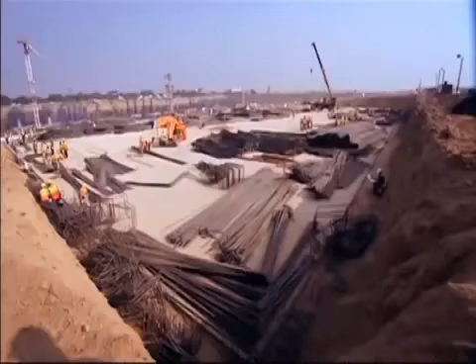A mammoth task completed against the backdrop of a looming deadline to the Commonwealth Games 2010. Thousands of workers construct India's largest post-independence building with unrelenting speed.

Technology was very much part of that system. I cannot change my specifications, I can't change the pipe. What are your deliverables at that stage?

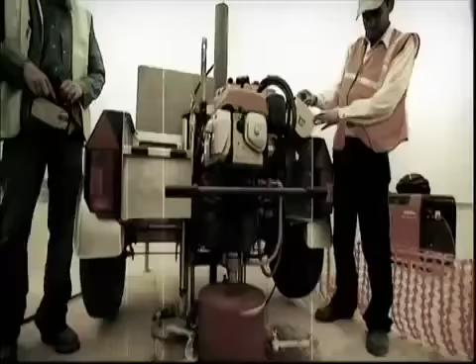This mega project brought in some of the brightest minds from across the world to design and build a state-of-the-art structure. Follow this team as they faced mind-numbing engineering challenges of installing a 45-acre roof and battled an unusual force. Everybody said no way, I can't put my name into this project because it is a seemingly impossible task before us. Watch this barren stretch of land on the outskirts of South Delhi, where a spectacular terminal megastructure comes to life in a record 37 months.

One of Asia's largest airport terminals, located in New Delhi, Terminal 3 is a symbol of India's emerging economic status. With a capacity of 34 million passengers per year, it propels the Indira Gandhi International Airport into one of South Asia's most important aviation hubs.

This complex mega project challenged the creators, the GMR Group, at every stage of construction. Enabling the Delhi airport to achieve a milestone of handling 73 aircraft movements in an hour, Terminal 3 is the first of its kind in India.

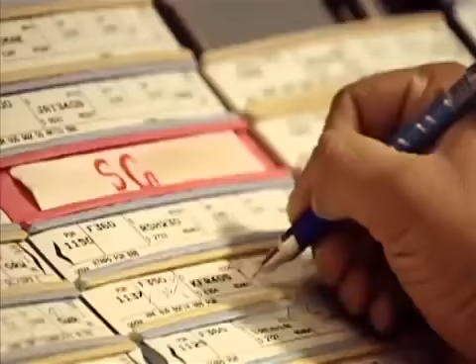There was something of an aviation gridlock, a traffic jam in the skies. So we had to make sure that our airport, the Delhi airport and the Mumbai airport, were good enough to cater to the needs of the next 25 years or so, and at least handling 50 to 100 million passengers.

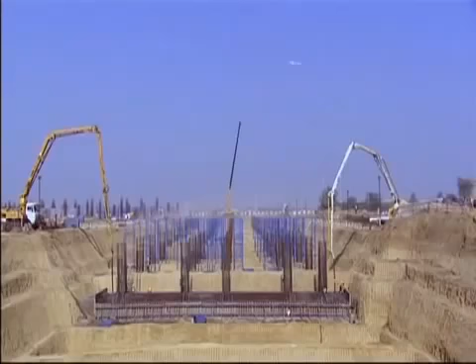On the southern outskirts of Delhi lay 300 acres of flat land, 3 times the size of the smallest country, the Vatican City. In 37 months, this is where the new terminal rose. On completion, it is said to be one of the largest and fastest built airports, an aerotropolis that represents modern Indian aspirations and infrastructure.

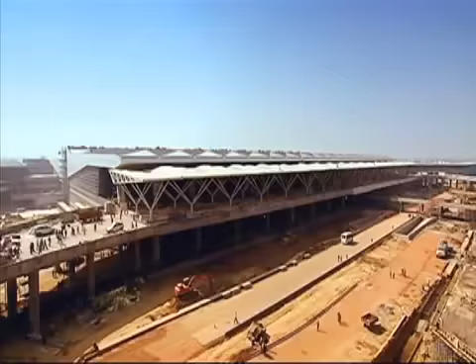In February 2004, bids were opened out by the government for the new terminal. The men behind the scenes had to be prepared for fierce competition. We prepared almost for 1 year before, and we put the best people assembled for the bidding. I should say it is a God-given opportunity to fly the flag of GMR in the capital city of Delhi. That is the commitment which made us win this bid.

January 31st, 2006, the GMR Group won the bid, but for a company that started with agriculture-based industries and had slowly moved into the infrastructure space over the past decade, getting the basics right was tougher than it seemed. GMR was new to the business of building airports, but raring to take off.

Chairman G.M. Rao, the man behind the vision, set out the roadmap for the project. We have taken almost 16 international consultants. And for us at that time, spending 34 crores for bidding was a huge amount of money.

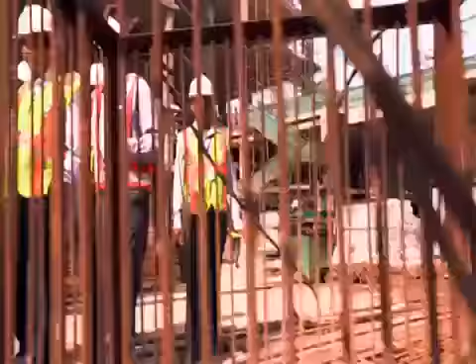Heading the project was I.P. Rao. That's the workshop, I need in 2-3 days time the whole design just to change. An industrial engineering veteran, having worked on several power and steel projects in the past, I.P. Rao was the angry young man of the airport - silent, strong and religious.

Rao's mantra was that belief in something can make it happen. The terminal was his baby. '17th, for example, yesterday, 0.21% plan.'

But he had never built an airport of this scale before. 'That's our major target.' His biggest fear was the deadline. 'This week overall, what is the daily shortfall here? We will definitely be falling short of the cable.' 37 months to build the airport from scratch. 'Once it's over, I want to sign off, seal it, then you can go full-fledged.'

Typically, construction of new terminals across the world takes over 60 months. Changi Airport's T3 in Singapore took 76 months, Beijing's T3 took 60 months, and so did Heathrow's Terminal 5 - from concept to commission.

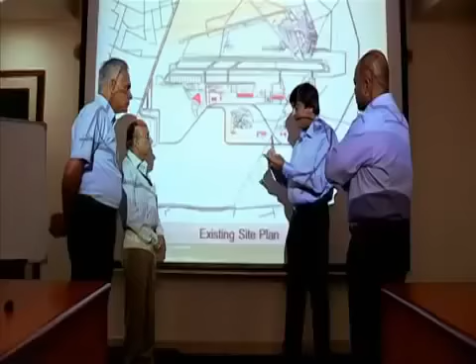At the very start of the project, I.P. Rao was faced with a challenge that tested his leadership. The GMR Group had bagged the country's most prestigious project, but then came a twist.

They requested us to shift the terminal from one side to another side. We had taken over the terminal which was built in the 1940s, and immediately after takeover, people were expecting that miracles would be done. There were certain parameters which they fixed that we had to change. It was a terminal built only for about 12 million passengers, but it was already handling 16.2 million passengers by that time. It was a Herculean task, but we were able to do it.

'How to do that? So gentlemen, that's the workshop.' It was April 2006. The master plan that GMR had presented was based on the government brief, but that had to be changed. It now had to come up at a location 180 degrees from where it was originally planned. 'Get more people, designers on the table, get all of you, and then sit down. I need a whole design just to change.'

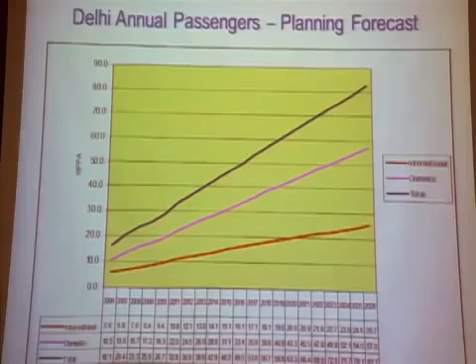This had many implications. Also, at the time of the bid, the government had proposed the terminal for 22 million passengers. But GMR conducted a study along with the travel trade industry and learnt that the terminal needed to have a capacity of up to 34 million passengers - that was 12 million more. Certainly not a small change.

The GMR team worked furiously on revising the master plan. 'But one thing, safety-wise, have you taken care of? The whole passenger requirement has tremendously changed. More than 1.5 times have been jumped, and then you have to redo the entire building and reroute the entire area. That's really given a big challenge for us.'

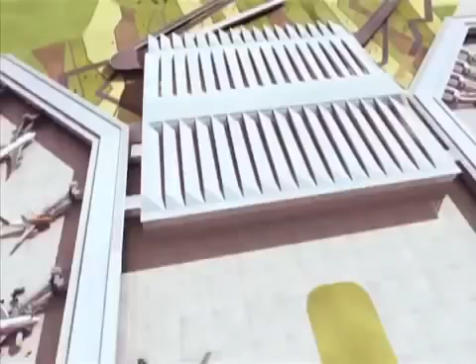The GMR Group studied various international airports like Dubai International Airport, Beijing Capital Airport, Seoul Incheon International Airport, London's Heathrow and Madrid's Barajas Airport to incorporate the best features for Delhi's new terminal. Finally, in December 2006, the new plan was approved.

The new passenger terminal building rises 9 levels, covers an area of 5.4 million square feet, approximately 94 football fields. The design is futuristic, with a strong emphasis on keeping it eco-friendly. Passenger flow is natural and instinctive, either moving towards the aircraft or away from it. Below them, almost 7 kilometers of baggage conveyor belts hurtle through, making for 5 levels of high-end automated security screening. At 4.43 kilometers, the airport's runway is the longest runway in Asia.

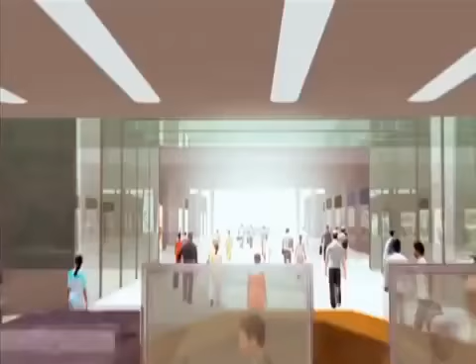Once the design parameters were fixed, the construction got underway, but it was not as simple as it seemed. 'I should really give credit to the government that for the first time a private airport operator, a private company, was called into a National Facilitation Committee, headed by the Cabinet Secretary and monitored by the Prime Minister himself. They were people who understood our challenges, and they've been pretty helpful for us in getting clearances.'

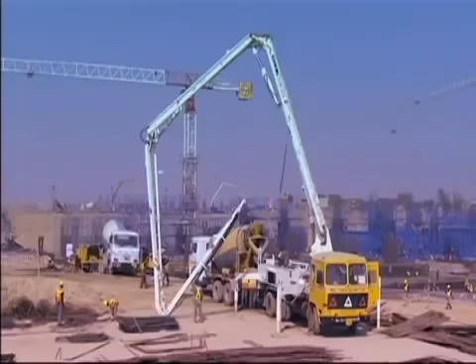'Delhi Airport - because the time was very short we had, so we had to do planning, designing, identifying a contractor, and at the same time implementing the project was going on very parallelly.' Larsen & Toubro, one of India's largest construction and engineering conglomerates, took on the runway, taxiway, aprons and the terminal building. 'When we got into it, we had to mobilize nearly 1,000 engineers from more than 40-50 nationalities, and to mobilize 30,000 workmen, to mobilize concrete production of nearly 1,000 cubic meters per day.'

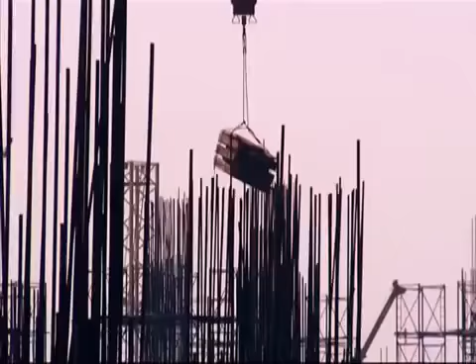At first, the land was flattened out and then the earth excavated, enough to fill a 210-kilometer long freight train. This project needed tons of steel, concrete and other building materials.

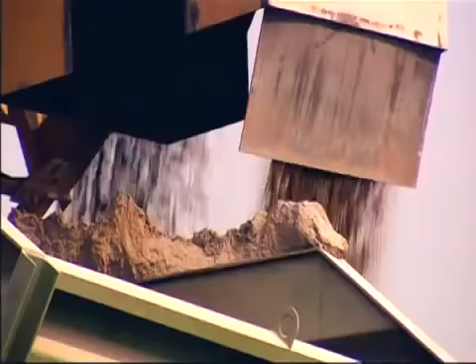To avoid disruption, it was decided to keep stocks of up to a month's requirement. The most modern and eco-friendly hot mix plant was imported from Italy and set up at the site. The plant was crucial to timely completion of the runway and terminal access roads.

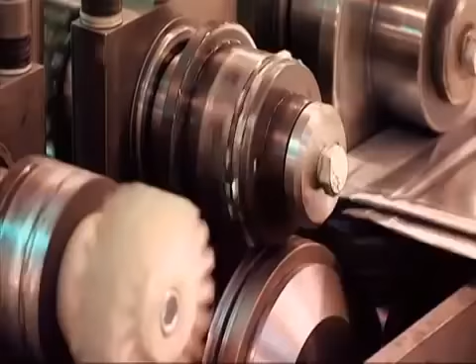Meanwhile, vendors were encouraged to move their fabrication units to the project site to cut down on logistic delays. We wanted to make sure as much as possible to have control of ourselves, so we bring the raw materials in and then we would shape them.

Before excavation started, the site of the runway was being evaluated. Active and animated despite his 70 years, R.C. Rekhi was the mastermind behind the plan and design of the new runway. The runway was envisioned such that the entire system could handle over 70 aircraft movements at peak hours.

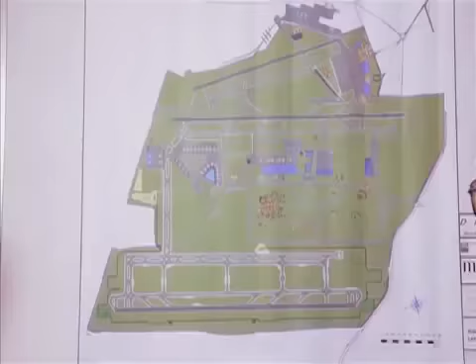But when the master plan changed, so did the direction of the runway. Now this posed a rather unique problem. The design and construction of Delhi's new runway was battling an unusual force.

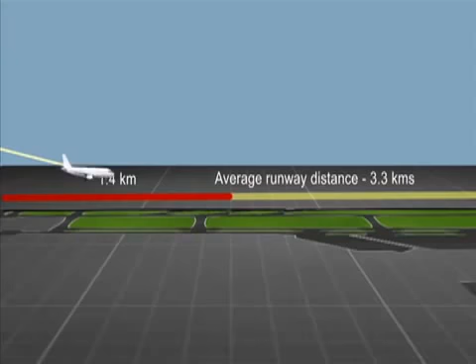Simulation showed that there was a nearly 80 feet high Hindu god Shiva statue in the flight path. Typically, incoming aircrafts must clear 1.4 kilometers of runway before they can touch down, but this was not possible due to the statue and its height.

This meant all flights must land almost 2 kilometers after the runway actually starts, forcing the pilots to use full brakes and reverse thrust to slow down before the runway ran out. This was extremely dangerous and could lead to accidents.

Lowering the statue or relocating it would no doubt raise religious sentiments and could take months. Simulations were done and detailed calculations and flight paths studied. Here were the best engineering minds looking for a solution.

So I asked the engineers to understand, tell me what is the way out. Sir, we have to shift by 10 degrees. If we shift by 10 degrees, the whole plan gets disturbed. So I told them, tell me, to what degree does the Shiva statue have to come out. We found 3 degrees. I fixed the runway and said go ahead. They were shocked. Sir, nowhere does this happen like this.

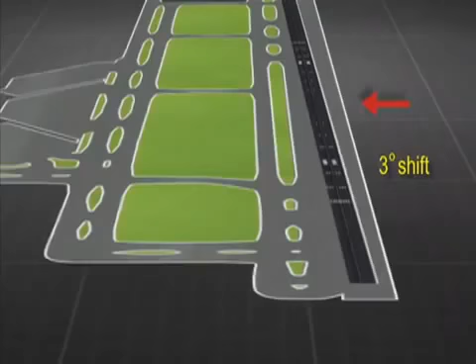At last, a solution emerged. The new runway was planned at a slant of 3 degrees from the original and was eventually extended by 1,460 meters to be compliant with air safety standards. At 4.43 kilometers, runway 1129 is one of Asia's longest runways. This allows planes to approach and land safely.

Construction finally began. But there was another problem. The site of the new runway had been a swamp for several decades. This had grave consequences for the new runway.

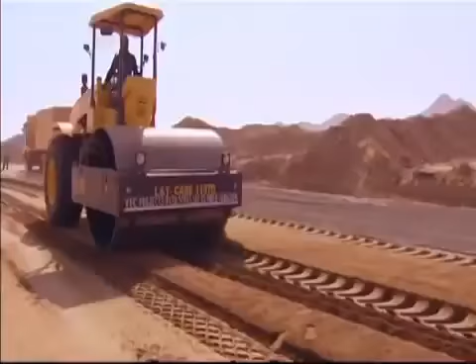This meant that soil on the runway site had very low load-bearing capacity, not enough to take aircraft load and landing impact. Ultimately, the load imposed by the aircraft has to be transmitted to the soil only. If the soil has a bearing capacity that is far lower, it only means your pavement thickness must increase correspondingly so that the load is transferred over a larger area of the soil.

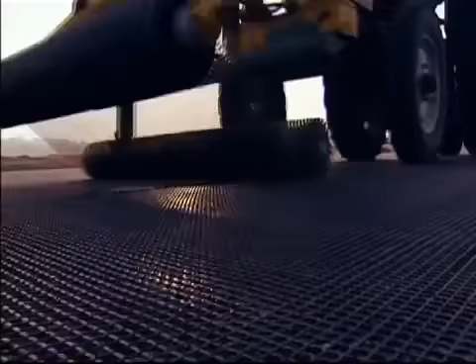The solution: to strengthen the soil by mixing it with cement and using glass grid fabric between the layers to increase the bond between them. For the first time in the country, we did this base layer with a cement-treated base. The aim was to design it for next-generation aircrafts like the A380s with a takeoff weight of 550 tons.

For the terminal structure, the real challenge was to keep the design simple and construction well planned. A lot was at stake. How will all this come together without chaos and wasteful mistakes?

Meanwhile, the existing domestic airport needed urgent attention. The existing facilities were creaking under the huge increase in traffic, both of passenger and aircraft movements. The domestic terminals were designed for 12 million but were already handling 16 million passengers. Improvement works had to be carried out in a saturated terminal, so it was a stupendous task, I would say. No other airport in the world has actually gone through this kind of rigor.

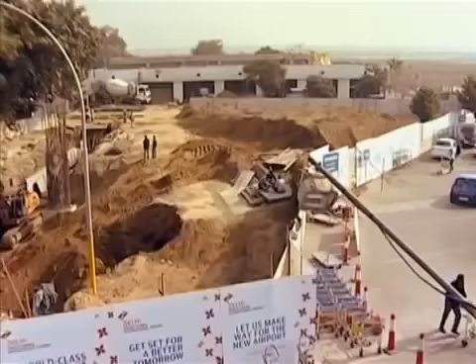GMR went on a war footing to solve this problem. We felt certainly there is an important need that we have to start a new terminal to decongest and also parallelly make it ready for T3. Terminal 1D was built to ease the pressure in the interim.

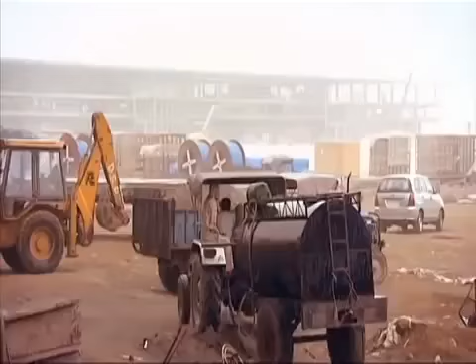Over 30,000 workers were on site in peak summer, through dust storms, the monsoons and foggy winters. Often they worked in precarious conditions, manning heavy machinery. At times, power would be intermittent, leaving electrical cranes hanging dangerously. Men would be caught in lifts and in darkness.

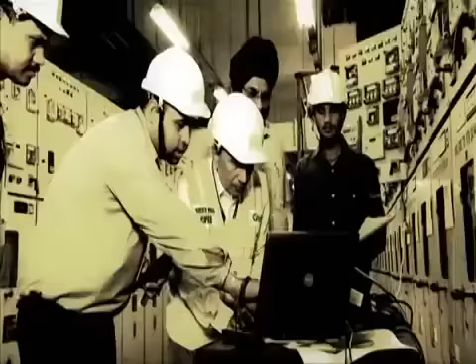Uninterrupted power was a key word for Sujit Nag. Highly disciplined and process-driven, Nag had to be on top of it all the time. There was no room for mistakes.

An electrical engineer by qualification, Sujit had worked in the US, UK and Asia, setting up power plants, mammoth projects with pressured deadlines. But he had never worked on a megastructure like this one.

His main responsibility was to power the construction works and later the Terminal T3, which would have millions of passengers walk through it from all parts of the globe. Very basic of having the power supply from the distribution company.

That was not ready, so obviously we have to carry out a temporary arrangement. Biggest challenge is that I commission the system, and at the same time, I give the power supply to the operational team.

Anil Dhawan, head and construction manager of T3, was a man on the move. He is athletic and passionate about fitness, whether he is on site or in office. In a military-like manner, Anil led the team that constructed the terminal.

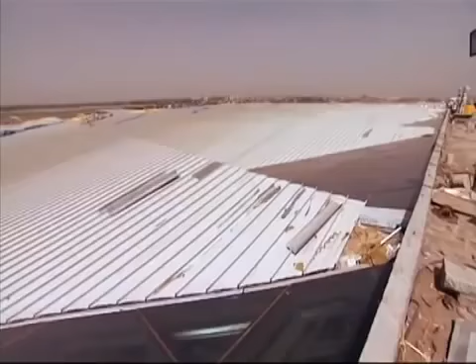Anil's big challenge was to assemble the roof. The expanse of the roof and the pier spread over 45 acres, and an 18,000-ton steel structure was to be installed on top of it.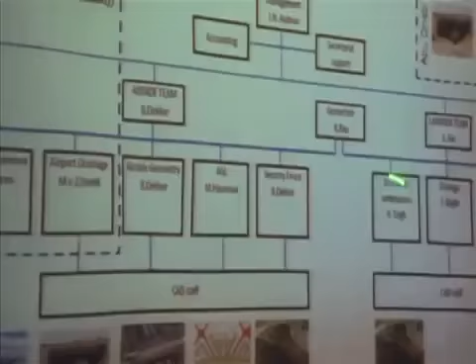The GMR team went over every engineering detail with a fine-tooth comb. Was the design sound? What kind of equipment was needed to achieve this task? What are the specifications that you would be actually... Anil needed to find answers soon.

Any delay in completing the roof would have cataclysmic effects on the costs. They had to cover an area of 45 acres with structural steel that was fabricated and brought in from Singapore. The critical element was the girders, which came in dimensions of 5 to 10 meters each.

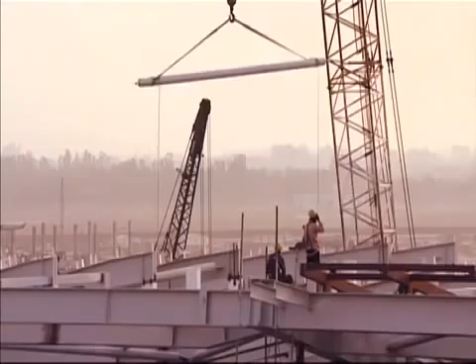For engineering purposes, the roof was divided into the land side and air side, and further divided into 6 smaller units for efficient handling and placement. Each of the 6 units weighed heavier than an A380 aircraft.

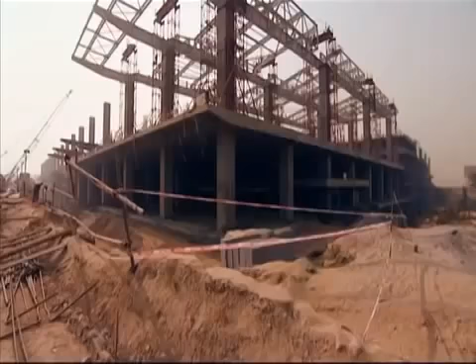We allowed ourselves about 6 months to actually complete the roof from start to finish. There was no room for error. Erecting the roof was a key milestone in terms of the project timeline, as it was only after this that all the other civil and technical works followed.

The weather was a key factor here. Our original plan was to have the roofing installed by April of 2009. The monsoons were only 5 months away, and GMR had to finish the roof structure before the rains lashed through Delhi.

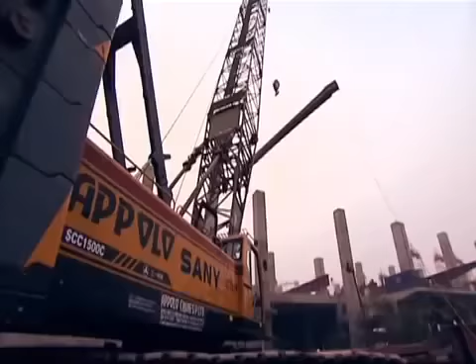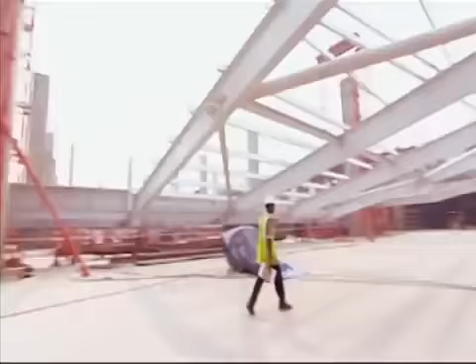Anil's team had been preparing intensely to begin fitting the roof structure, and they were now ready to start. Each of the units were first assembled at the 10-meter departure level, then raised 18 meters using computer-operated hydraulic jacks.

Every millimeter lift had to be done in unison, its alignment checked multiple times. A minute glitch could have disastrous consequences on the project timeline. Engineers were on edge as this sort of lift required utmost precision.

Each lift took about 6 to 8 hours. But designing of the lifting system took us 2 months, and getting the jacks required for that took another 2 months. So really, physically to start at site, 4 months of back work we did on the table. 22 months left to go.

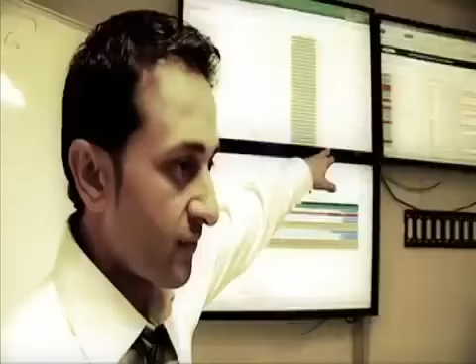Davesh Shukla was young, hungry and powered by a strong creative streak to create something one of its kind. If his IT systems failed, the entire airport would collapse.

Bring in efficiencies, better operation procedures, and make people's life more easier, and at the end of the day, that's what integration is about. By the time we finished, it was more than 75 systems that we started integrating together.

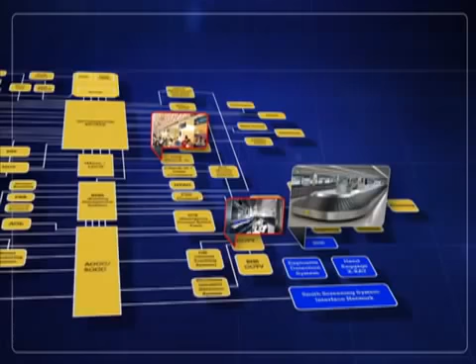If Davesh has his way, then his IT systems will connect every system in the airport, from check-in counters, baggage handling, airport screens, lighting, passenger movement systems like boarding bridges, emergency systems like the fire department, and key services like immigration.

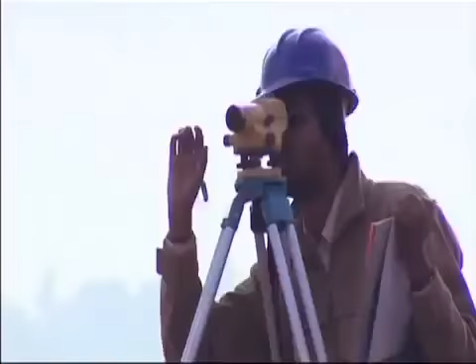It is practically the lifeblood of the airport. The aim being to make for a faster turnaround of planes taking off and landing, and most importantly, giving the passenger a smooth experience. Meanwhile on the runway, Rekhi and his team were on the last leg to finishing the construction. They now had the challenge of delivering a high-tech runway.

There was a dense fog that settled over Delhi during winter that resulted in very poor visibility. Flights were either cancelled or delayed as they were unable to land or take off in these conditions.

To make matters worse, the runway site was close to a green belt, so the intensity of the fog was even higher around here. To counter the thick fog, it was decided that the runway was to be made Cat 3B compliant, which meant it will allow flights to land and take off even when visibility is as low as 50 meters.

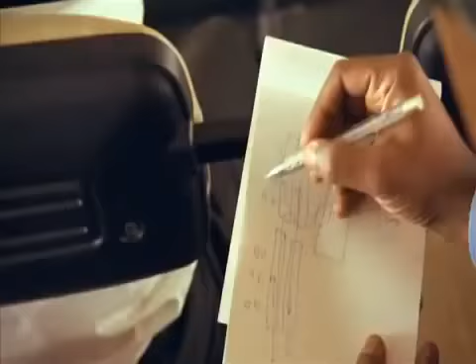An Indian origin Singaporean citizen, Roy, is a people's person, but he had no easy task. He is responsible for everything that enables movement in the terminal: travelators, passenger bays, and baggage belts. He had to set up the complicated maze of belts that would safely transport and handle 12,800 bags per hour. The expected footfall by 2020 was projected to be over 60 million.

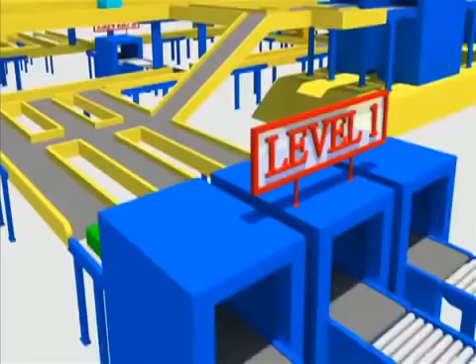We actually went into Changi Airport, KLIA, Hong Kong CLK, including Munich and Heathrow London. So there we actually tried to understand what exactly the best practices they follow. The baggage handling system design was a complex one. Terminal 3 has a state-of-the-art complex that features the common use terminal equipment baggage handling system with explosive detection technology for greater efficiency and security.

Hello, hi ma'am, how's you?

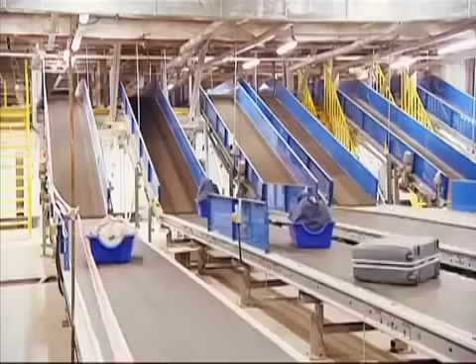Once the passenger checks in their bags, the bags go through a number of checks. At first, if a bag going through the X-ray check is found to be suspicious, it is automatically separated and diverted through another channel. If that is actually clear, the bag will go to the respective destination. And if it's not clear, we have a team of security experts who will visualize these images and interpret their content. And if it is accepted, it will go to the respective destination.

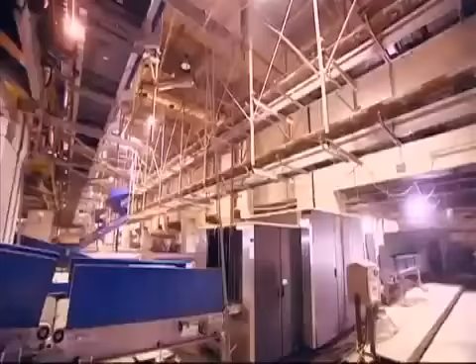And if it is rejected, it will go to the next level of screening, which is our CT screening, where it will slice the bag into 65 different pieces, inspect and take a decision. If it is rejected again, it will go to a team of experts reviewing those images. From there, an accepted bag will go to the destination, and a rejected bag will go into level 4 screening area.

Work on the baggage handling system began and the key contract was awarded to Siemens.

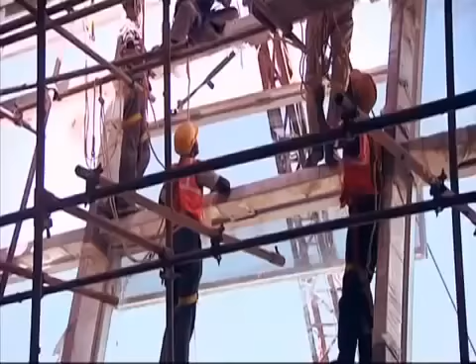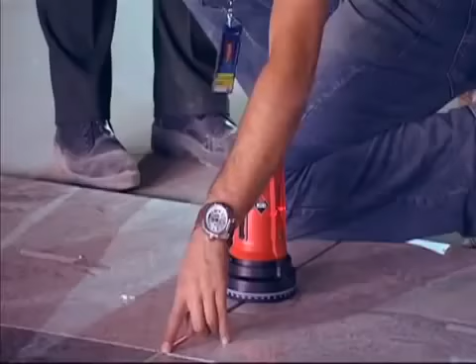In other parts of the terminal, glass was being fitted. Flooring was simultaneously being laid and was closely supervised, checking the level after each step. Laser-guided measurement tools were used to ensure that over 100,000 square meters of granite tiles imported from Brazil were properly aligned.

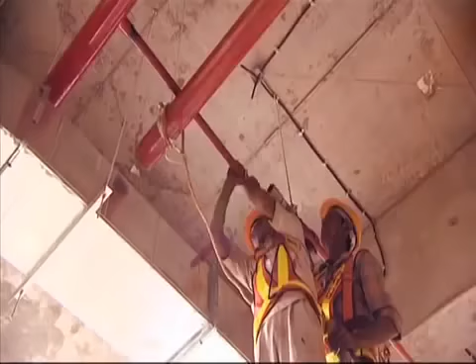With multiple vendors at work, clashes broke out. It threatened to upset the schedule, result in cost overruns and engineering nightmares.

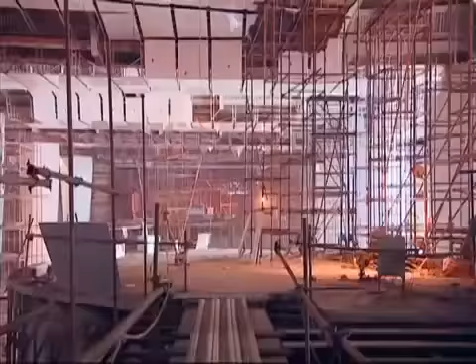So in September 2008, GMR brought in the BIM, or the 3D Building Information Modeling software. You fed in all information and technical specifications of each aspect—power, baggage handling, IT and security—and it simulated conflict areas, and programmed the flow of work and resources required.

This stage of construction was the most pressured. I think this was probably the only project, the first project to have employed that, and to have actually developed a 3D model where all the obstructions were looked at and cleared prior to the installation. We saved cost, we saved time, and we were able to produce a quality product.

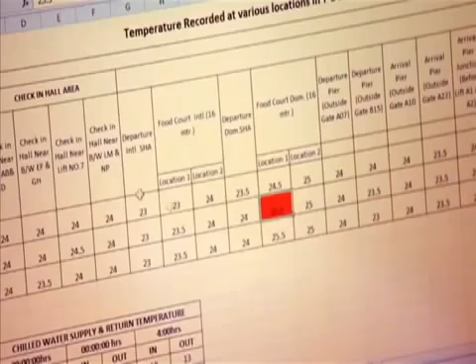Sujit Nag had an added brief to ensure that the airport was environment friendly and LEED certified. Temperatures in Delhi range from 5 degrees in winter to an extreme almost 45 degrees in summer. All the glass meant higher power usage to keep the area cool and comfortable for passengers. It was a tricky balance of maintaining good lighting conditions and keeping the heat out.

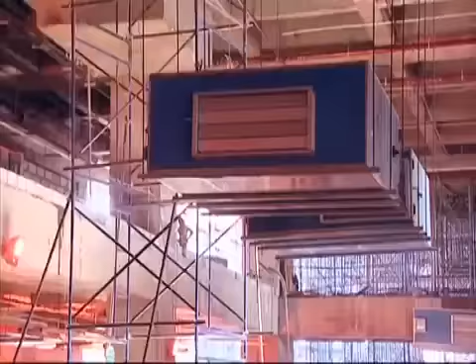The roof was designed with slits to take advantage of and use natural light. A central monitoring system, CMS, is used to control automatic sensors that detect day and night times and sets temperature and light accordingly to use the least energy.

We are the first airport that achieved this. No other airport in the world has got a green building certification in gold category.

It's action stations at all ends and the deadline is crashingly close. Will everything come together in time?

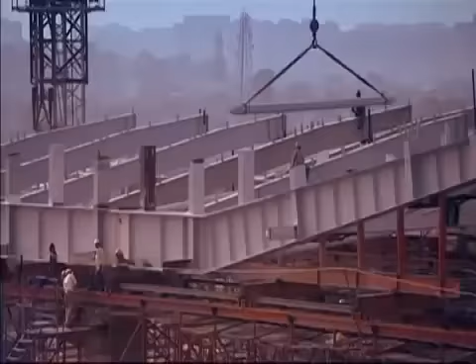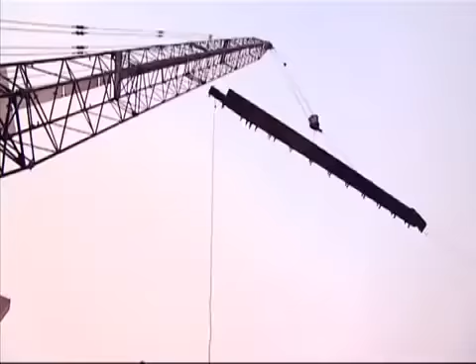Meanwhile, Anil was racing against time to finish the roof before the monsoons arrived. On the air side, GMR adopted the pull method to install the roof. Cranes carried the massive structural steel girders to the top of the tower, where each section was assembled and pulled to an intermediary level. Finally, with 4 massive horizontal pulls, the roof layout was completed. Week after week, 18,000 metric tons of structural steel was fabricated, assembled and raised.

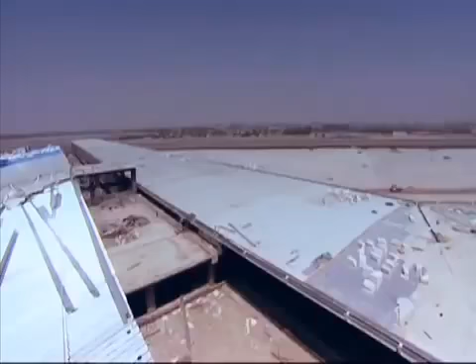The roof of the terminal and the pier spread over 1.3 million square meters. The 7-layer sheeting system was designed to provide the highest degree of insulation and sound deadening. Finally, the roof was covered and completed. It was a key milestone.

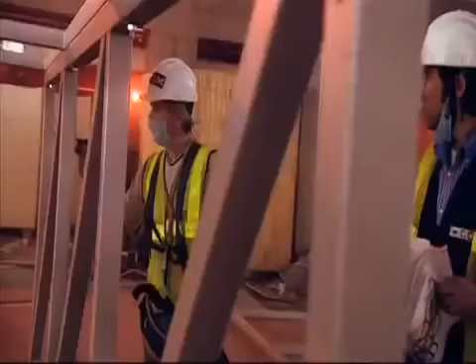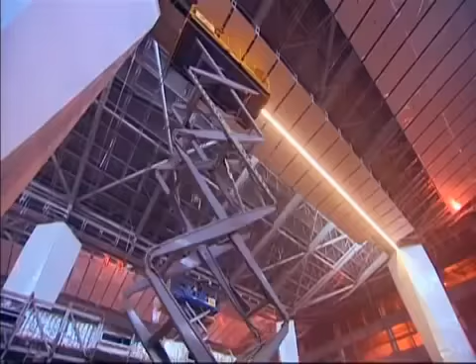Engineers and vendors already at work on site redoubled their efforts, now adding all the elements that turned what is said to be India's largest post-independence public building into its most prestigious airport. Suspended from the roof were a number of essential services like the air conditioning, fire prevention sprinklers and lighting fixtures. All these had to be in place before the false ceiling hid them away from the view of the visitors.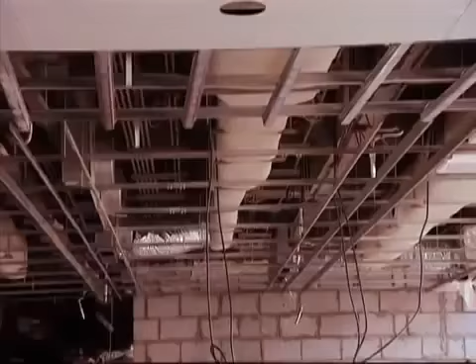For the ceiling, L&T was called in. The false ceiling contractor got into the job and then realized that there's such a massive area that all the false ceiling people in India put together could not manage this. So we had to train our own people, get them inside.

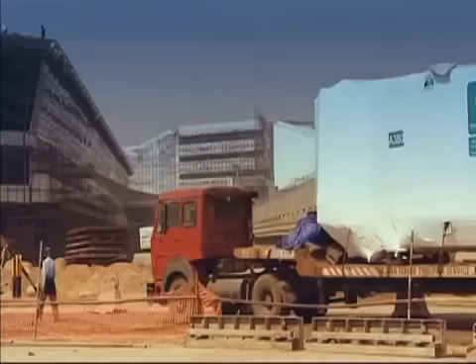On the air side, a complex set of processes were at play. Roy oversaw the installation of the passenger boarding bays. These were manufactured in China and Japan and transported to the project site in Delhi. They are delicate units that fit into the aircraft door at one end and at the terminal on the other. Any damage to the units would render them useless or dangerous to install.

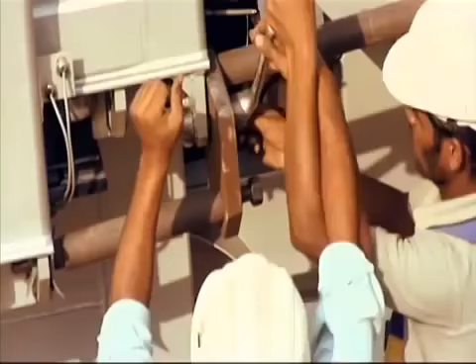July 2009, Roy and his team were tracking progress. Then one night, he received a call. 2 of the trucks transporting the delicate passenger bays had overturned in an accident. The bays were badly damaged. With just 8 months to go, it was impossible to manufacture new units.

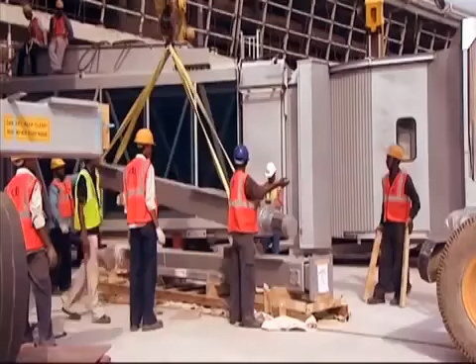Roy had to come up with some other solution. We tried to actually recover these 2 units, but it was not possible because of misalignment. So we, together with the factory team members, sat together and diverted 2 bridges which were actually meant for other airports, converted that with our dimension, and transported back on a timely basis.

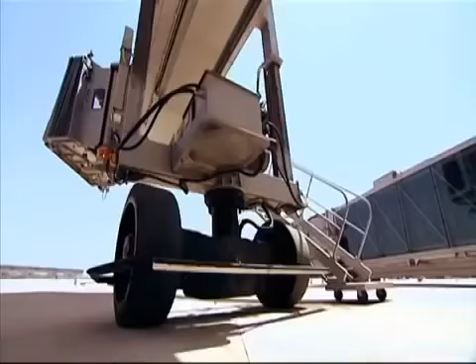Roy and his team started installing the bays. It took 6 hours to install each one, and there were 78 bays to be installed. It was high alert on all fronts. All departments were working furiously 24/7 to complete construction, fittings and interiors.

In about 180 days, starting January 2010, all systems were to be put to test in a 24-week drill, the Operational Readiness and Airport Transfer, or ORAT.

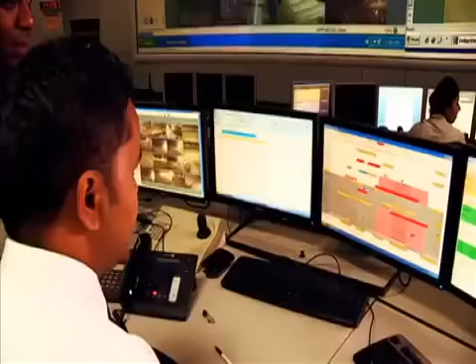We engaged Munich Airport, who have successfully done ORAT in a number of airports, including Bangkok, including Hyderabad. And we engaged them because they have a lot of experience. But very importantly, we had a team built around them so that that experience and that knowledge could be transferred to our team.

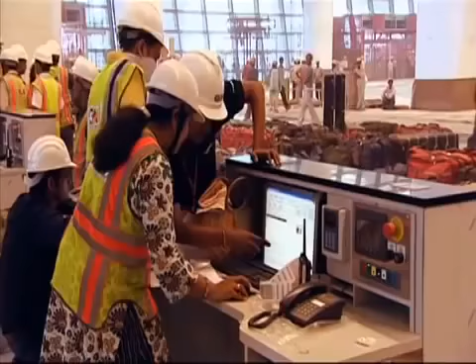Were construction and systems ready on time? Did they pass the tests Harrison put them through? 'You are professionals, act as professionals.'

Finally, the ORAT, which is a test run of live airport scenarios, begins. For 6 months, 56 trial drills using 50,000 mock passengers were conducted to test all systems and processes, each one a little tougher than the one before.

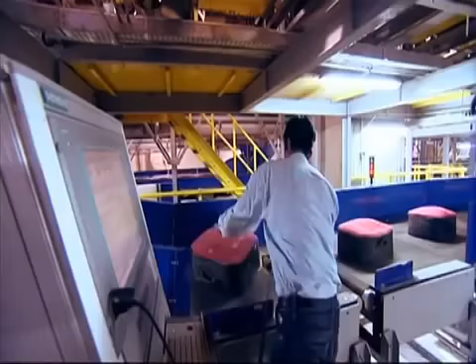Here is one scenario. The baggage handling system had to be tested with over 27,000 dummy bags and identification tags created for 36 flights. All check-in bags had to be tagged with a code to enable automated identification so the bags could be sorted and loaded into the respective airlines without glitches. Any error could hinder the check-in and boarding process and result in flight delays.

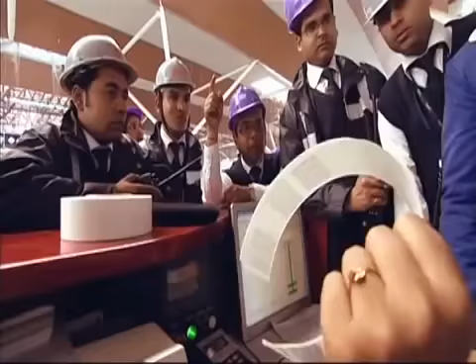GMR had to make certain airport staff were fully prepared to operate the complex 5-level automated baggage system, and this needed meticulous planning. It was painstaking and exhausting, but had to be done. There are also a number of systems like check-in counters and flight schedules that had to work together seamlessly.

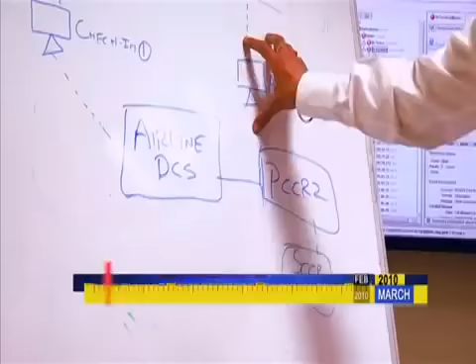Our difficulty is the airline back office connectivity, that the airlines cannot connect to the back office. But all was not well with the terminal's IT system. February 2010, the workforce was suddenly close to breaking point as ORAT started. Merely a month left for completion and a couple of months before opening day, he realized that the IT network design for the airline back office system did not meet the requirement of the airlines. So that would mean that we cannot open the airport up, or if we open the airport up, the airlines cannot do the back office functionality. And that would cause a huge grief to the airlines and ground handlers. So at that point, we thought that if we don't get this right, then I think we're going to have an issue with the airport operation.

Managing people was equally tough. One big challenge for Andrew was changing the mindsets of the workers and training them to use the new technology.

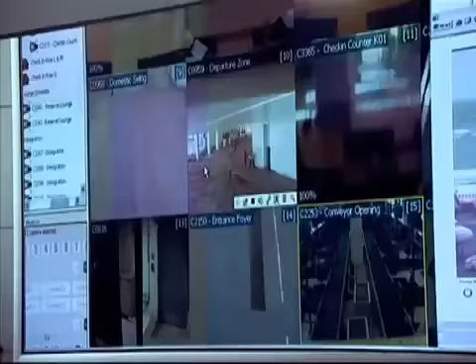Opening was now just a month away. The operations control room under Andrew was monitoring every square inch of the airport, with over 3,000 surveillance cameras rolling 24/7.

The artwork and finishes team was also on overdrive, overseeing installation of elements that gave Terminal 3 its character. Project head IP Rao was on one of his many rounds of inspection. Before he gave the thumbs up for opening day, he had to ensure all bottlenecks were cleared and there were minimal teething problems.

Change was about to set in. Delhi was set to unveil Terminal 3, an extraordinary dream, after 37 months of hard work and challenges. But for the passenger, GMR needed to ensure it was smooth sailing right from check-in to baggage screening, clearing security and enjoying the retail and food and beverage experience, all in good time to board the flight and guarantee a hassle-free transit.

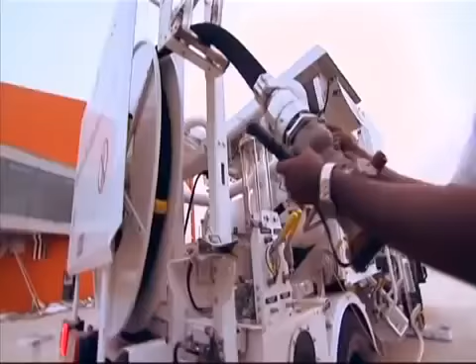Down below, the baggage conveyor belts swiftly rolled into action. Out on the apron, the fire tenders, refueling vehicles fell into place. The first commercial flight docked at Terminal 3, bringing in travellers who marvelled at this first-of-a-kind structure in India.

I'm actually stunned. I love it. I'm really glad that we've managed to do this. And it's definitely one of the better airports I've been to.

After 37 high-pressure months for the GMR-led team, T3 in New Delhi is now a visible symbol of New India and her new economy. We are very happy that we are also meeting the same standard of other airports internationally. Whenever we used to come here, it was always a bit of a disappointment. But now, I think we have come over that and we are very, very proud.